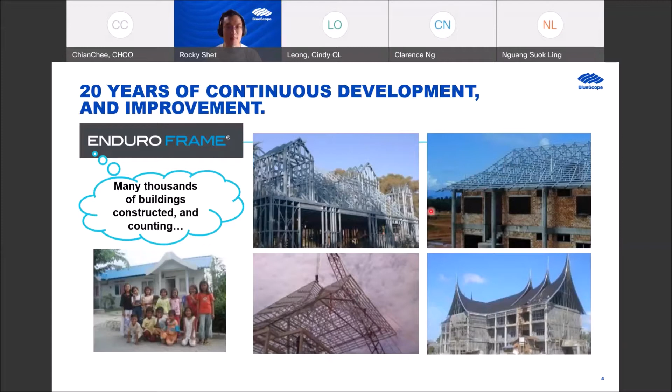We have moved on and improved, with more development and growth throughout the Australian environment, and also increasingly growing elsewhere in the world. Here you can see one of the projects in China, I'm not sure exactly where. And this is another one in a different part of the world, as you can see, one of our gentlemen here from South Africa. So this is how we have grown since 20 years ago using this system.

You can see here our system provider on a global scale, more so in Southeast Asia, because we started in Southeast Asia introducing our lightweight steel framing, especially the trusses. Then it moved back to Australia, and you can see Australia has been very successful with that model using our ENDUROFRAME system. We were also able to have a presence in Algeria and Ghana, also using our ENDUROFRAME system.

The ENDUROFRAME system is a complete steel frame system which encompasses two main players. The first, on the software side, is called EnduroCADD, and the hardware is a roll former machine called Enduro Roll Former. These two integrate with each other. We also have another software called EnduroHub, which integrates the whole digital technology, to offer a lightweight steel frame solution. To go about it, we provide training and support to our system providers on how to efficiently use our system and software to help in their projects.

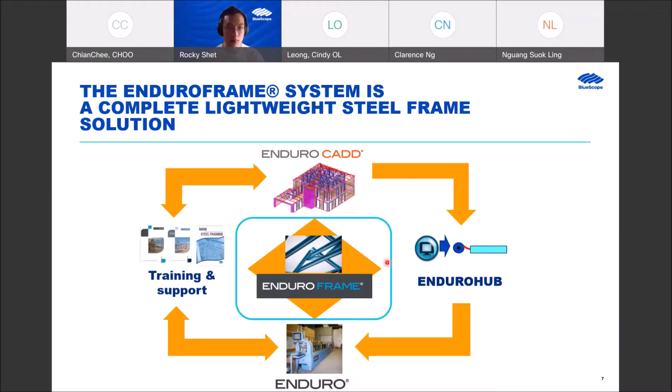We are also very lightweight in equipment - we only need one machine, the Enduro roll form machine, to generate two profiles that make up the whole complete framing system: a C section and a U section, manufactured through one machine. This C section is very unique. These two sections come in three sizes: 90 mm, 75 mm, and 70 mm in height.

As you can see, the flanges of the C section - the top flange is 40 mm, whereas the bottom flange is 38 mm. This is a special feature of our system. Also for this C section, you can see there's a rib on both sides of the web. This rib profile gives us 20% more strength over a plain C channel.

These C channels are meant to be used for our trusses as top chords, bottom chords, and also the internal members, the webs. This C rib channel is also used in our wall frames for all the studs in the wall frame.

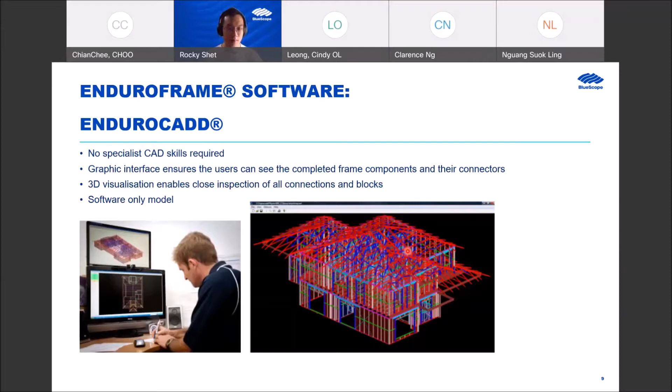Also, this software, EnduroCADD, allows great design flexibility to meet modern world construction, modern roof construction, like so. And also this complex roof shape can be easily modeled and detailed with the EnduroCADD software, eventually manufactured from our dedicated roll form machine.

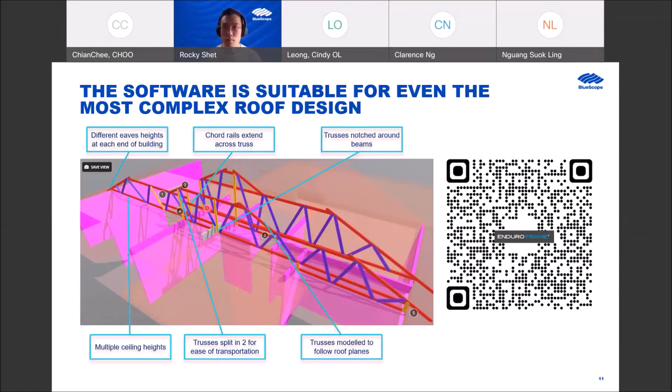Just to share with you, this software is also suitable for even the most complex roof designs like shown here. And you can see it's plain and simple and easy to conform to the complexity of this roof design.

To know more in depth of this complex roof trusses, I would like everyone in the floor, if you don't mind, to do a bit of exercise. Take out your smartphone, and hopefully you have a QR code scanner. If you can scan this code here, that would bring you to this graphics in a dynamic form.

Cindy also placed the link in the chat box, so if you are using the same device, you can click that link also. Okay, so here we go. When you click on the link, it will take you to this page here.

As you can see, you can use your two fingers to zoom in, zoom out, or use your finger to flick it to rotate it, like so.

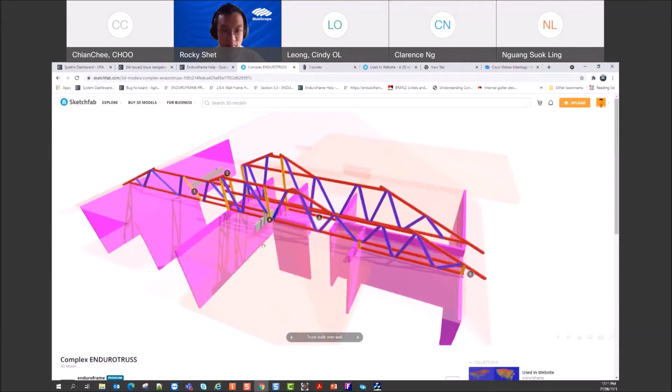Over here we have 5 pointers to bring to your attention. Firstly, it tells you this truss was built over the wall, and this truss automatically notched over the wall with a lower ceiling. So you can see how versatile the software is to adapt and conform to the structural requirements of the building.

And then the next one is here. You can see this truss can be split into two to ease the logistics, to make it into two parts so that it can be transported to the site easily.

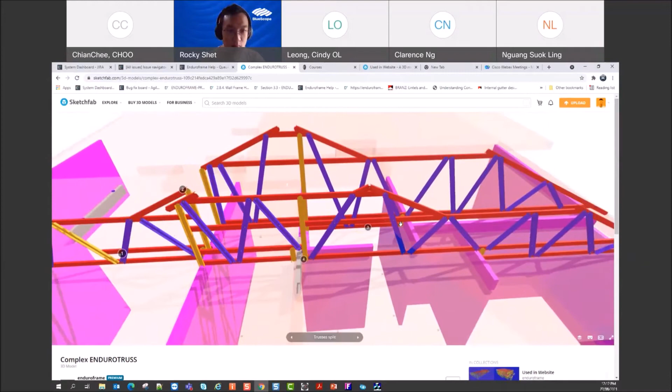And the next one is, you can see the ceiling can be lowered in the hallway, so no additional bulkhead is required. So you save a lot of materials here. Again, this software is very sophisticated, and you're able to do that.

And then the next one here, you can see there's a beam hidden in the ceiling. This would form a void block to have the structural beam sitting onto the wall, at the same time provide structural support over this truss here.

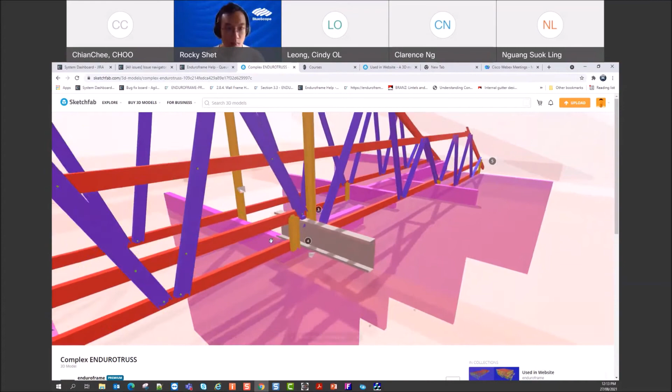And also, when there is a drop in the structural wall, we are able to keep to the roof profile by using a cut-off truss here to conform to the roof shape. So you can see this is where the software is suitable for that complexity of a roof.

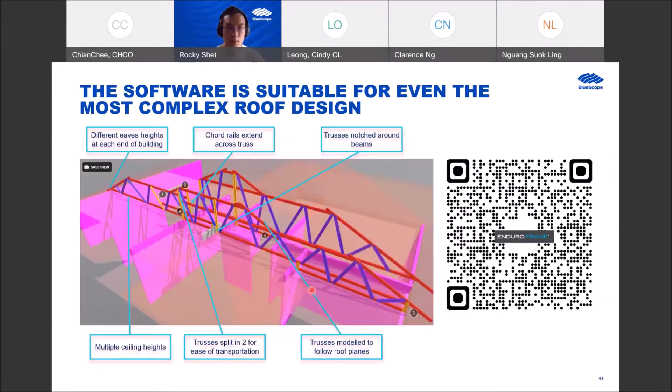Just to share with you, in the context of the Australian market, you can see our system provider has actually used our software in various types of projects. For example, this is a McDonald's standalone building, and then the other one is a kindergarten steel structure building. All these are lightweight steel framing, and we're happy to be able to provide that kind of solution to our system provider.

And this is how it works. The ENDUROCADD is the software behind our ENDUROFRAME system, which sets it apart and delivers an efficient framing model. And this is how the process is.

First and foremost, our software ENDUROCADD will read the architectural plan. We call it the E architectural plan, or D architectural plan, E for electronic, or D for digital. The format of it is in DXF format. Once that is available, the ENDUROCADD software will quickly develop a 3D model of that particular project or house, and then it will model all the steel framing components in that model.

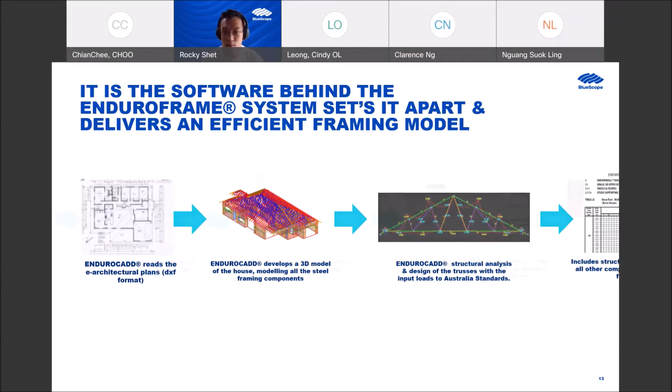We're also looking at other components like the wall frame components. We've included structural design tables to cater for that wall framing requirement, and then it will prepare the numerical control data, or NC data, for manufacturing.

So once all this is confirmed and signed off by the client, we get the software to prepare the certification for the trusses and for the wall frames in lieu of an engineer certification.

This is the first software in Australia which is compliant with what we call the ABCB protocol, Australian Building Codes Board protocol. The software is able to generate that certification without needing to go through a third-party engineering certification.

So next, once the sign-off has completed, all this NC data will send into our roll former machine, which has a software called ENDUROHUB, and this integrates to schedule the manufacturing orders of that project.

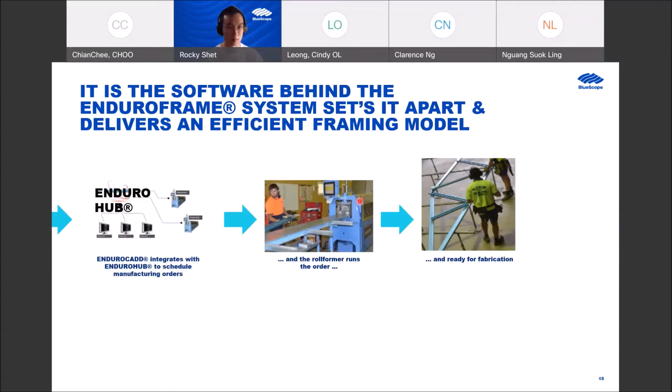The roll formers will then run the orders and get them ready for fabrication. Once the fabrication is completed, they are delivered to the site as a finished product, like you saw here on this screen. It looks exactly like a timber truss, but it is definitely much lighter.

You can see you don't need many people to actually lift that truss up to the roof for installation, and you can see the plasterboard is easily attached to our frame.

We also provide multiple service holes to cater for the wiring or water pipes that go through the frame around the whole project. And also, being steel, it's very straight—you don't need to shim it or add any packing.

Being steel, they are very straight. And also you can see that some of our parts here are actually linked like sausages.

If it's needed to assemble at the site, these are easily packed nicely in order. So when they go to the site and unpack it, they can know what components to look for when they do the assembly on site.

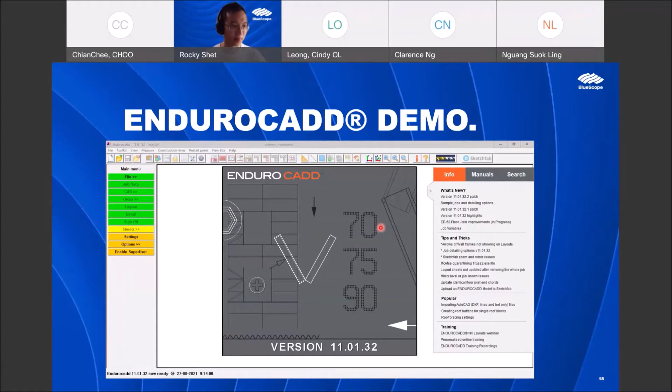So my second part presentation is to actually demo to everyone how we use our software. For this webinar, I have selected a simple job, a single story, simple job, so that we could actually finish on time.

Let me unshare my slide and go back to my software, which is over here. First and foremost, that drawing that I've shown you just now, I will need to import into my software, and this is how I go about importing it.

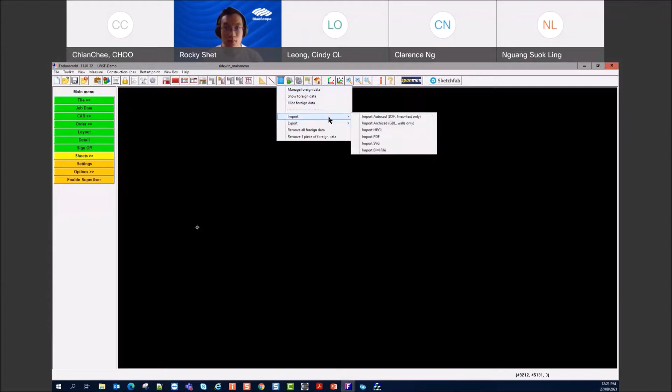This is over here, and this is how it looks like once it's imported. The same drawing that I showed just now in my presentation is all shown here.

Now I actually need the plan of this building to model, and I don't need the rest, so I need to click that plan there.

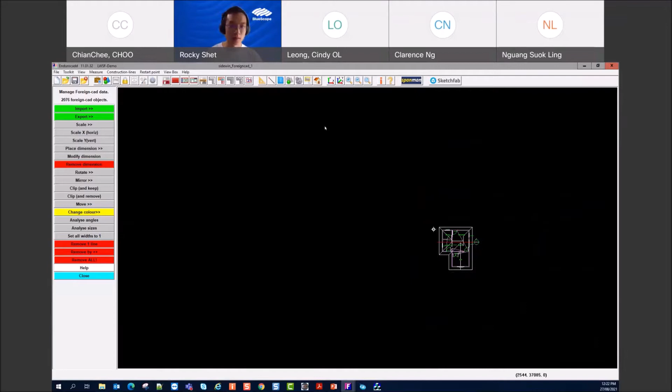Thanks for your patience, let me show you the flow of the software. So once that's imported, and like I said, we need this plan only, and the rest we don't have to keep in the software, so we can discard it.

The next thing I need to do is quickly show you those parameters that were highlighted that need to be input here, like the roof pitch, the overhang, and the truss spacing, which are all clearly shown in that architect drawing. So I need to capture those and put them in here.

We also need to put in the live load of the top chord and dead load of the top chord. In the plan, it's actually using a tile roof, so we need to put in the appropriate weight of the tile that the top chord will be supporting, and also the batten spacing that supports the roof tiles to be restrained onto our top chord.

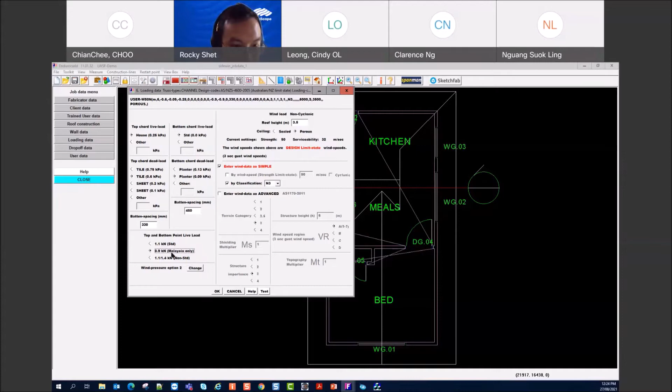We also need the point live load as per the Australian standard AS 4600. In the Australian context, we assign 1.1 kilonewton as standard. If this were to be used in Malaysia, being the fact that Malaysians are smaller in size, we could use a lighter point live load to design the top and bottom chord of the trusses. Does that mean it's the weight of one person? Yes, that's right.

And then the next one is basically the wind load here. I'm using N3, which is equivalent to 50 meters per second. If you have anything less than that, you can select this one, and it actually tells you it's 40 meters per second. So these are all the important parameters that the software will use when designing the components.

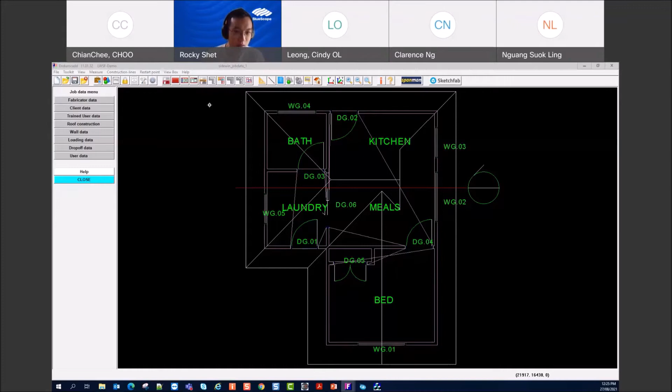So once that's out of the way... So just now the parameters, one thing I saw is that there are actually different tiles in terms of weight that you selected, so it can be a heavier roof tile or lighter roof sheet, correct? Correct, that's right. For example, here we have 4 entries, 2 for roof sheet and 2 for concrete tiles.

However, if the concrete tiles specified in the architect drawing is more than this value, then we need to go in here and put in that value as specified, say for example 0.65, and the software will use that information in the design. So this software also provides that kind of flexibility in case it doesn't fall into these 4 main typical categories of dead loads.

Does it include, say, the weight of the insulation, if that was the case? Good question. If you want to include the insulation, this is the right time to include it together with your roof tiles over here. So you need to manually calculate the insulation plus your tile weight, so maybe you could pump it up to 0.69, for example, including insulation. This is where you input that specific dead load, and the software will use that figure in the design.

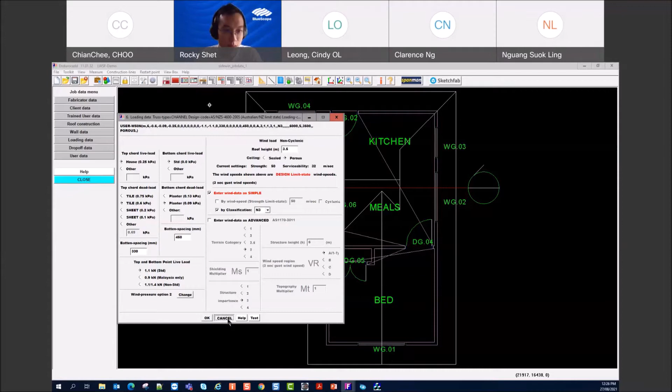All right, so in essence it's just the whole roof system weight. Yep, the dead load, they call it the dead load. Okay.

All right, so once that is completed, the next thing is basically we need to go in and start doing the modeling. Just to show you how easily it is.

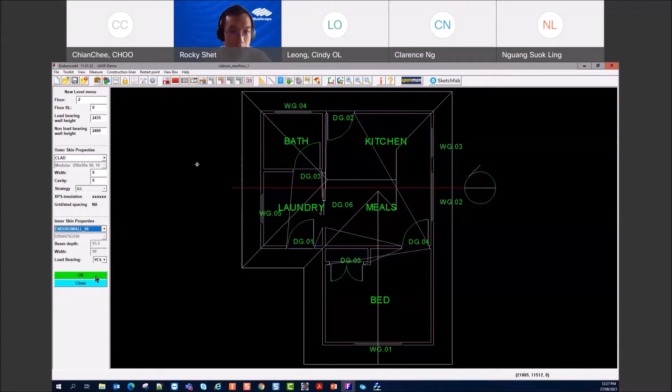I need to ascertain what is specified in the architect drawing, using a wall frame of 90mm. I need to make sure that's correct, because in my system here I have not only 90, but also 75mm and 70mm. So it's good to double confirm that it's 90mm that the frame can be used to meet the specification of the client. Once that's satisfactory, all I need to do is trace the outline of this external wall here, like so.

So you can see straight away it is actually forming the wall rather than lines. That's how we model. We model the wall and not draw line by line.

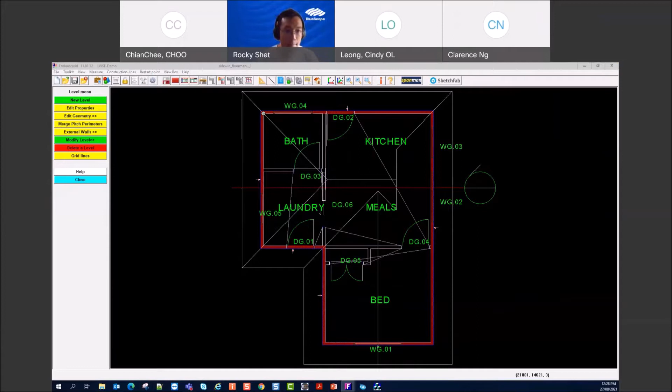So over here, has the frame already been constructed inside the software? Yep. So for the sake of this demonstration, I have actually pre-traced the wall and also the internal wall.

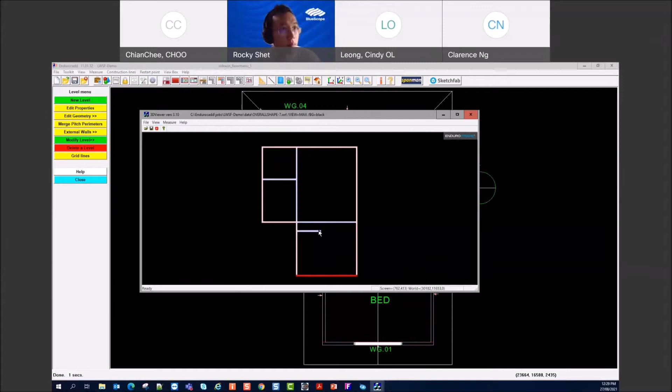Let's see. So the internal wall is easily traced. Okay, and you can see there's one wall missing here, accidentally not put in, so I can show you how that internal wall can be quickly put in. Okay, let's do that.

Let me hide this. You can see the wall was forgotten to put in, in a rush. So let's put in that wall to demonstrate how that is done. We go on to the next one, a new wall. I need to insert that wall there. And then...

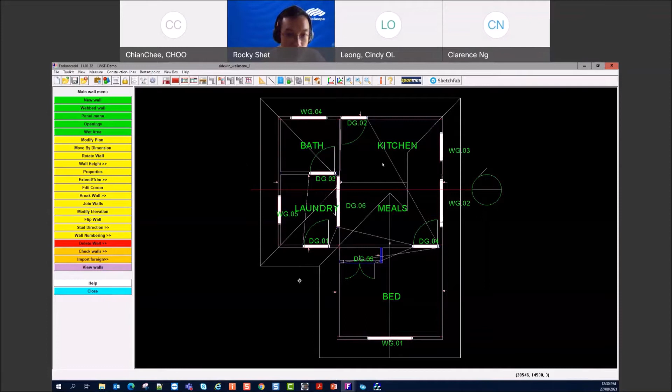If I were to hide this, you can see that wall is there already. So it's quickly done using this software, and it's now shown very clearly. That wall is there, together with all the openings.

Mr. Choo, I noticed there are some color coding, one in blue and one in red. What would be the difference? Yes, the one in red is what we call the load-bearing wall. Load-bearing wall is where it actually supports the truss, the truss sits on it. And then the blue one we call a non-load-bearing wall.

So does that mean, if let's say the owner wants to remove that wall, provided this has been given a green light from the engineers themselves, then they can do so for the non-load bearing wall? Yes, correct, that's right. So the owner or whoever wants to do a modification needs to get their engineer to give the green light, knowing this will not affect anything structurally, especially the truss above the wall.

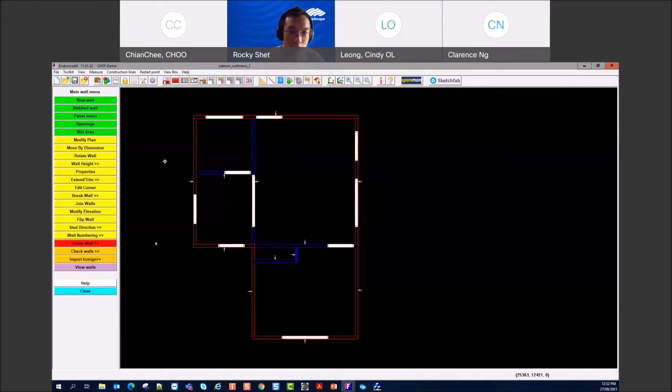So are these counted for in the early stage, before it's being constructed? Or has this already identified that, the blue would be the non-load bearing wall? Yep, this would also be identified in the structural drawing. The structural drawing will define whether there are any internal walls to be a load-bearing wall. So we will also follow that structural drawing.

And if this needs to be a load-bearing wall, we will convert this into a load-bearing wall, if that is the case. And then sometimes, when there's a revision of drawing, and they say this is not a load-bearing wall, we have to revise our model to reflect that change in the revision.

I might be jumping the gun here, there are quite a lot of questions, but I think after this wall is constructed, I recall straight away the trusses or so-called members would have already been in place, right, in the wall itself? Yes, correct, that's right.

But let's finish the model first, because this software process is actually model up and design down. Let me share with you the right phrase to use. So this is what I'm doing, I start with a model up first.

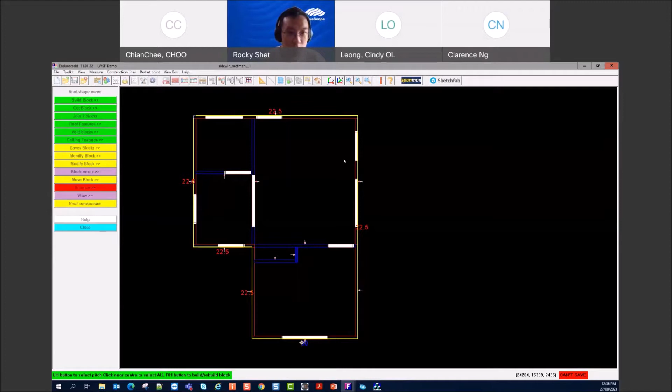Okay, I need to change this one to 90 degrees because this one, 90 degrees, is actually a gable end, which is different from this end here, which is called a hip end. Okay, stay with me, let me finish this process.

And straight away, there you go, it has a roof block in there. And straight away you can see, so I have a gable end here, which is a 90 degree that causes the gable end, and the rest are hip, conforming to the roof pitch of 22.5 degrees.

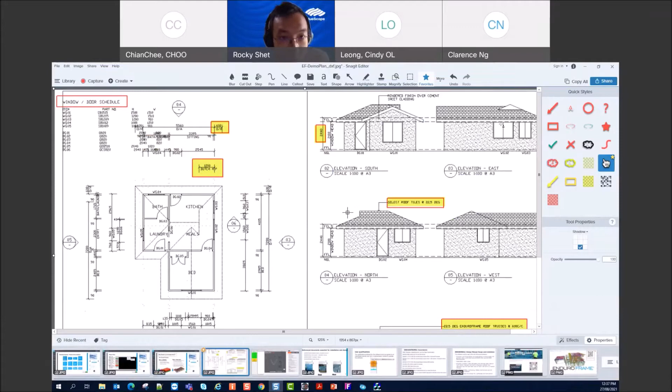And if you look back to our customer drawing over here, you can see the roof here is a bit different, not a hip, they want it to be a Dutch shape. Okay, so we need to comply to that requirement, so I need to do a bit more work to change to the customer's roof profile. And to do that, this is what I need to do.

I do a face cut here, and then the software will be able to digest this process, and it tells you, hey, I identified the hip and hip at both ends, is this correct? I will say yes, that is correct. And then move on to this roof block and it tells you, hey, I identified a gable end here and a saddle roof over here, okay, let's say it's correct. All right, and here you go.

Now I need to add the feature, the Dutch shape feature. I select this roof pitch, and then I set back by 1200 as per the architect drawing. And yep, it looks correct, and it tells you this is a hip and this is a Dutch hip.

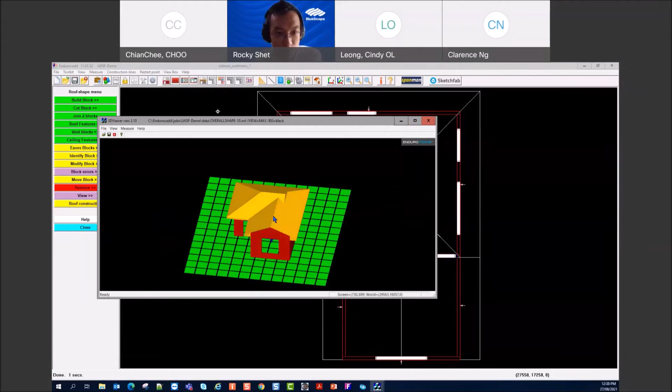Okay, and again, we look at our model again, and this could easily conform to the fact that we are doing exactly what the client wants us to model. And this looks exactly as the customer's house. So this is so-called the model.

Without any supporting member yet? No, not yet. Okay, this is cool, just the modeling process. Okay, so once I got this done, modeling process, now I need to actually follow the next step, which is this one here, start building down. Okay.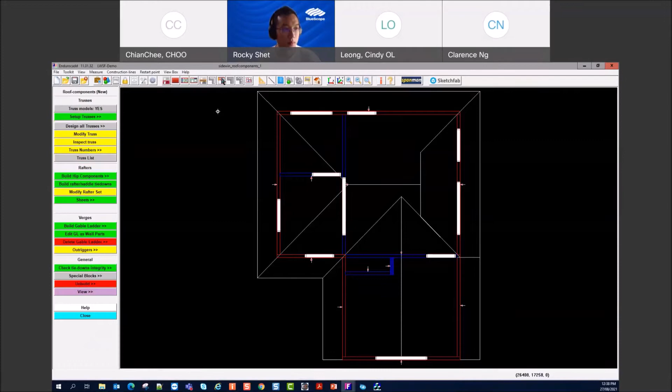So the next step would be here. And then I need to set up the trusses, and straight away the software utilizes the information that we have input earlier, where the truss spacing, remember, was 600. So it knows how to put all those trusses in accordance to that 600 truss spacing.

So it will be taking some time to do some calculation and distribution, right? You can see here, it's telling you what it's doing, it's setting up the trusses now. Okay, 9 trusses, so now it's looking at truss 3, and then we'll move on to 4 and finishes at 9. While it's doing that, I think it's a good chance for us to answer some questions from the floor, which I think might be relevant.

So, is it able to be combined into BIM modeling? One of the questions, the answer is yes, we can export this into the BIM, lock, stock and barrel, our ENDUROFRAME components, everything. Yep, we can export it into the BIM software.

Okay, cool. And another question, which is regarding the ENDUROFRAME roll forming machine, is that regarding to your earlier slide about the C channel and the U channel. Yes, so the question is, any reason why U channel is still being produced even though the C channel has 20% extra strength compared to the U channel, and wouldn't it be much more efficient to have a production line that has only one machine instead of 2 machines? So I believe the question comes in because they would assume U channel would have one machine and then C channel would have another machine. Perhaps Mr. Choo, you can enlighten us on how these two channels are being made.

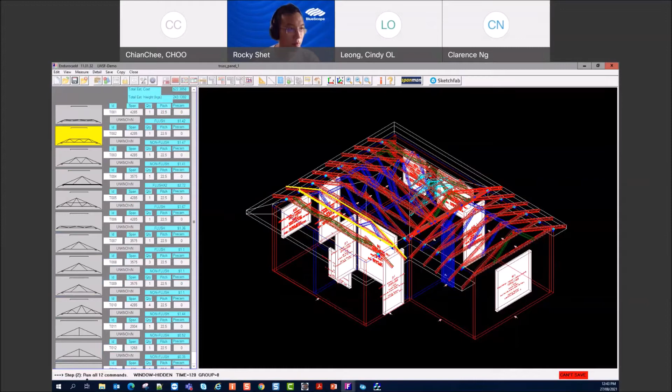So we need to design, which means we need to change this word 'unknown' to either design pass or fail. To do that, we can come here, select all trusses, and auto design all trusses fixed web. So this is another process. Here you go, it is actually running all the commands there.

And while we let it finish, is there any other question I could quickly answer? Okay, great, yeah there are a few questions. So I think some are jumping the gun here regarding the wind loading, because I believe later we'll be sharing how to actually improve the design to withstand a certain wind load.

They are also self-certifying, self-certification in lieu of engineer's endorsement. So that one we will come back to after the design of the trusses has been done.

I think maybe during this process it's good to also answer this question: is this EnduroFrame, can it be designed and calculated and verified by professional engineers? I'd love to answer that question also later on.

Okay good, if Rocky can put it in a parking lot there so that you won't miss it. Thank you, there are overwhelmingly a lot of questions.

So okay, maybe this is more towards the EnduroCAD question: is the software used developed by BlueScope, and is it available for engineers to use publicly?

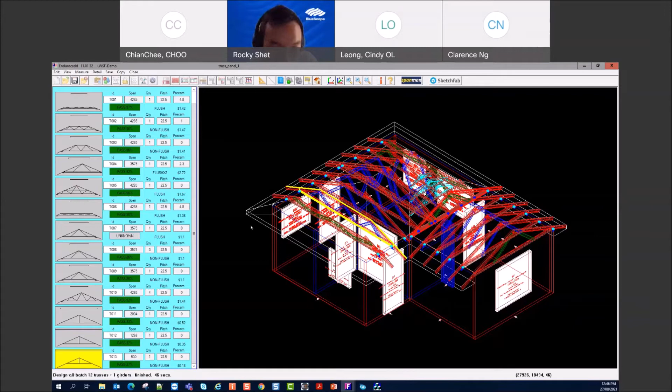All right, cool. So I believe the trusses are done. Yep, the trusses are done. Okay, I have one here, you can see it's still unknown.

Okay, let's look at why it is unknown, whereas the rest of the trusses are all design pass. So at least I got something to show you all why it is unknown, rather than all pass and then you don't learn anything.

Let's quickly explain what the audience are seeing. The green ones on the left are already designed and pass all the codes stipulated in AS4600.

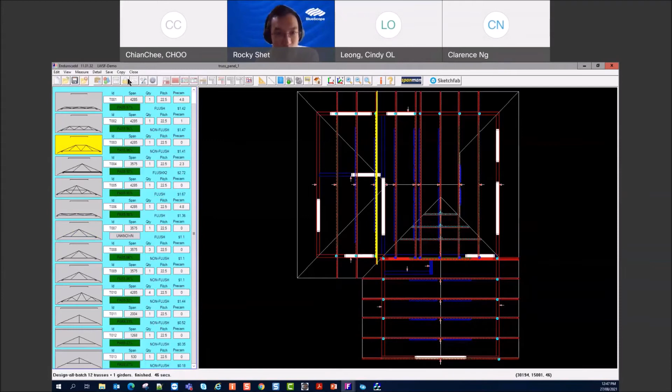Okay, let's look at this one here. When I left click on this one, it tells me I'm looking at this truss. So this software is very focused - at least we know what we are looking at and what we're dealing with. Now let's come back to this truss here and go in and have a look why this one fails.

And you bring up this screen here. Usually we click design fixed webs here, and then we go and check, and it tells us, hang on, that's not enough support. So that's why the software will not proceed with the design.

So that's how the integrity of the software works - where the model is correct, the software knows what to do. When the model is not in line, the software will know and prompt you, saying 'I cannot move on because there's no support, I cannot design.' Okay, you guys with me? So I'll stop this one.

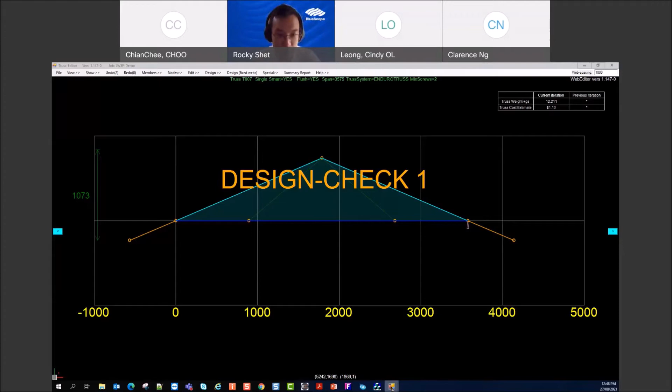Okay, I'll stop this one and have a look at this model closely.

If you look at the trusses next to it, you have these blue dots here. The software understood this model, and these blue dots indicate there would be a support there. However, because it's so close to the edge, the software got kind of confused, so it stopped designing this.

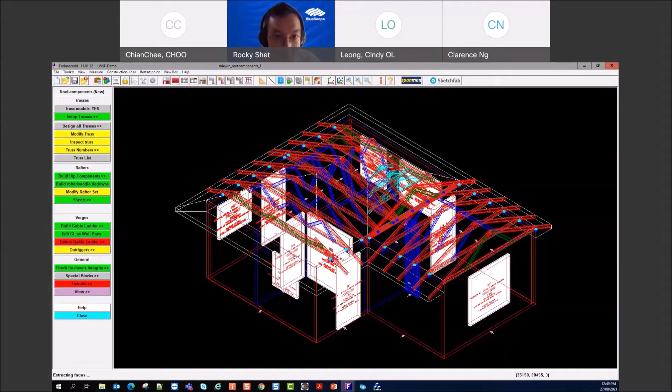So I need to make it right. Let me close this one and quickly show you this model in 3D, which is over here.

As you can see, I have a gable wall here, and as it happens this gable truss is actually very close, in fact clashing with that wall there.

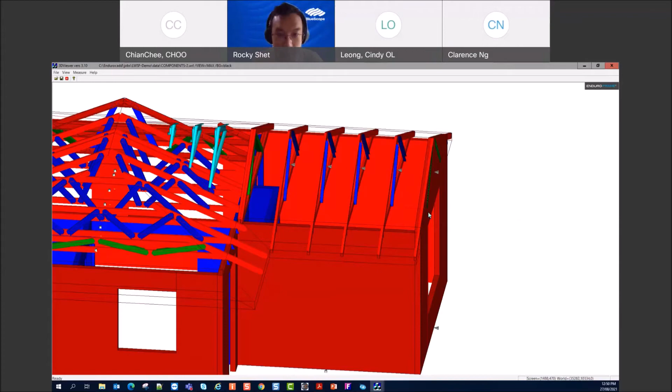So what I need to do is avoid this conflict. I need to manually have the software move these trusses away from this gable wall so they're not conflicting with each other. That's probably why the software wasn't able to put in a truss support, like shown here in blue triangle, at this end. So let's do that.

Let's go to plan view and click on this truss, then move by distance. I want to move inwards, into the negative direction, so I put negative — maybe I move about 100mm into the building.

You can see straight away that it's been moved, and something is happening — you're able to detect the load bearing wall, and it puts the support for the trusses there.

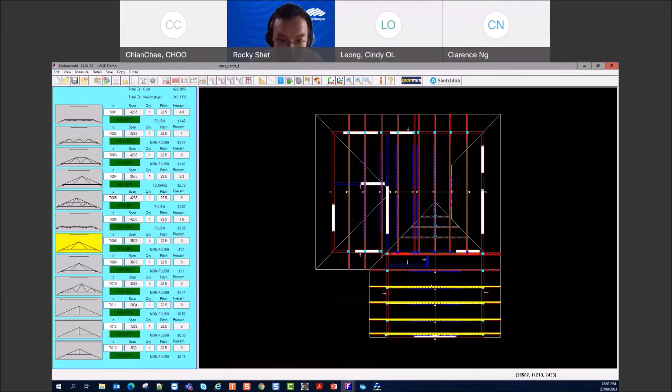Now I go back to that truss list, and it's able to understand the action I've done — it actually groups the truss I moved in by 100mm to be the same truss as the other one. So now it's grouped into truss 8. I see, so we have some intelligence in there.

So this is basically the roof truss section, right? Yep, so let's look at this one. This is that roof truss, and this is how it looks like as a real truss — with the real members, bottom chord, top chord, and the webs.

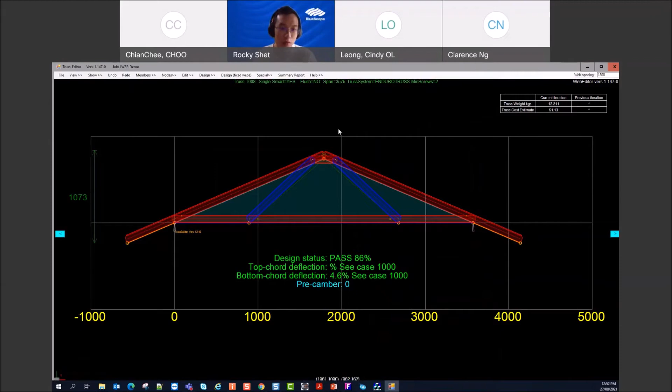So Mr. Choo, if I may stop you there — can you explain a bit about the design status? What does this mean, 80% pass, 86% pass? Okay, good question.

Let me show you behind the scenes, the engineering part of it. There's another screen here, and then right now...

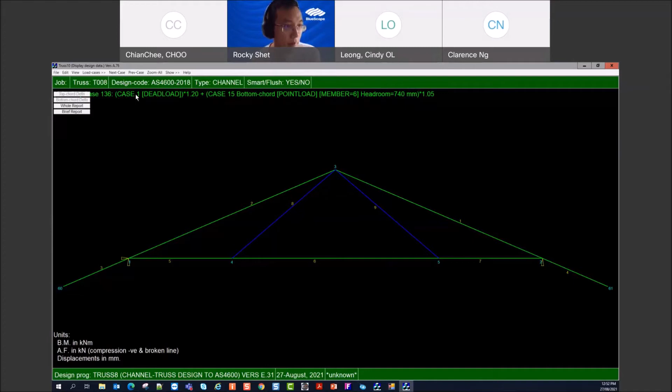Right now this software is looking at load case 136, which is the worst case scenario, designed to Australian code AS4600. Load case 136 is a combination of dead load in load case 1 times factor 1.2, plus load case 15, which is a bottom point load, with a factor of safety 1.05.

If I were to show the applied loads, here you go — this is load case 136, so the dead loads plus this point load. This would give us a worst case scenario.

You also give us the reaction due to this load case 136, and you're talking about that performance — what was the performance just now? You're talking about 86% pass. You can see here, 86%.

So it's referring to this connection here that is working very hard compared to other parts of the components. Due to this load case 136, this gives the worst case of 86% — meaning it actually utilized 86% of its capacity, which has a reserve strength of about 14%. So it's working very hard compared to other parts of the roof.

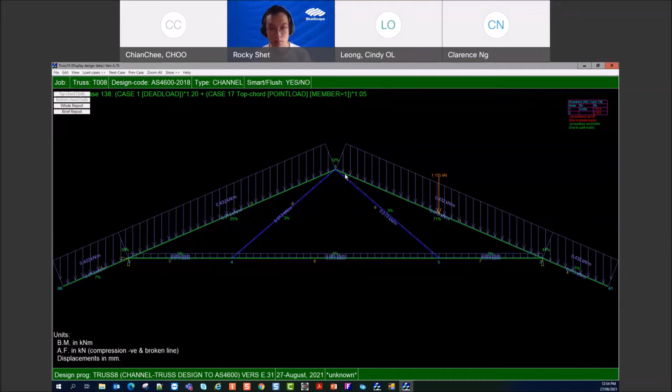If we look at the next load case, you can see it's 66% due to a different load case. So the software is clever enough to pick the worst case scenario and tell us that, due to load case 136, its design performance is 86%.

So you know, inside this software it has coded all the needed, required loads and load combinations specified in Australian standards. We have primary loads here — dead load, live load, and others — which constitute about 18 load cases for the primary loads. Then from load case 100 onwards...

Can you imagine doing it by hand? Yep — up to load case 139, so there are 39 load combination cases that the software designs accordingly as needed in the code. And last but not least, starting from 1000 to 1023, so we have 23 load combination cases to look after the deflection of this truss.

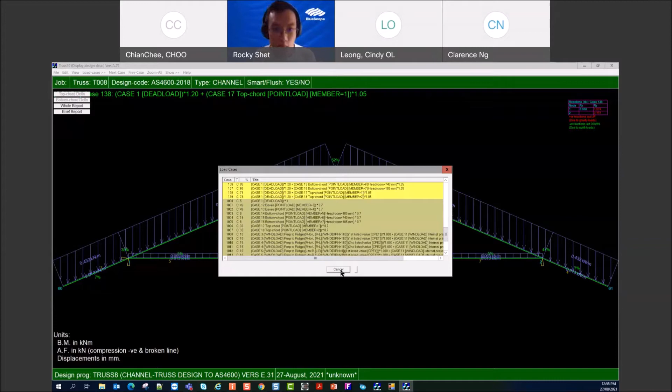So this software is very, very versatile in that sense. It takes into consideration all the possible load combinations in the design process. Right, yep, this is true.

Is it able to, I mean, just now you mentioned 86%, right? Are you able to improve, so-called reduce the capacity, reduce the percentage to a lower percent so that it doesn't get so close to the capacity load? Okay, meaning before we go any further, here we can actually get the software to calculate the performance of that connection, and that's where the 86% comes in.

And over here, this node actually has 8 screws that we have test data stored in the software, to understand and to be able to provide a very efficient design in terms of our product scope.

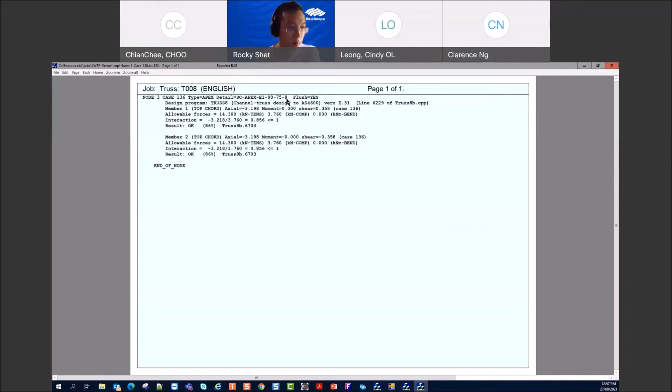So back to your question, let's close this one and go back to this one. So like I said, it's shown 8 screws, or if you were to look here, we also have a label that tells you this is an 8 screw connection.

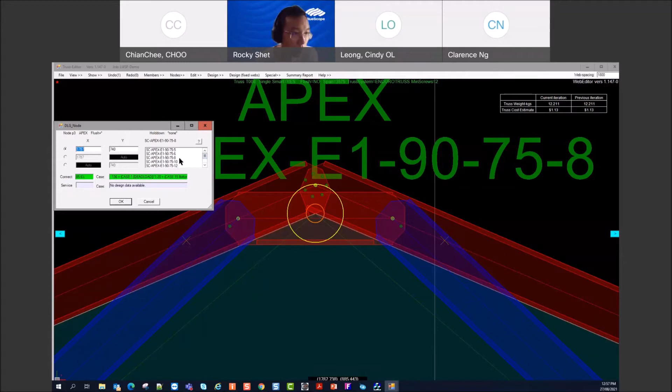So when I click here and edit this node, it has stored for this node a few types of required connections, and the software will use this information to do the design process, and it will pick the right combination of screws that could satisfy this design.

As you can see, it started with 5 screw, then 6 screw, 8 screw, 10 screw, and 12 screw, and it goes all the way to some other combination. The reason it stopped at 8 is because it knows that it's very close to 100%. Anything over 100%, it will fail the design.

So for example, I want to use the 5 screw here to test the design. I go with the design using 5 screw, and then it straight away tells me, see, it's not able to restrain the design requirement with 5 screw.

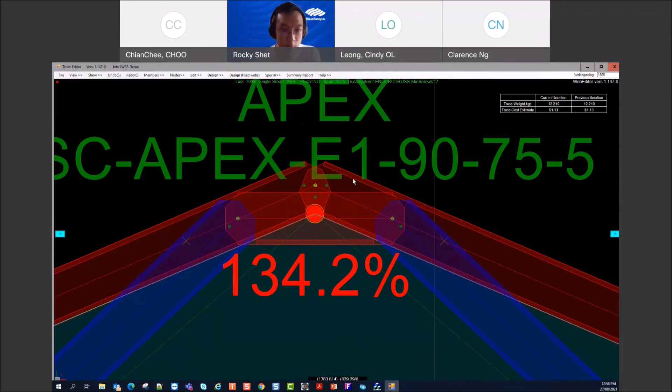So the screws, even though it's so minute, plays a huge role in the integrity. It does, yeah. It does, it does, yeah. So you can see it.

I get it to start at 5 screw, and it understood, and it went into the design process, and straight away tells me that 5 screw cannot do the job, and is failing at 134%. So that's how accurate the design is using this software.

So I'll let the software make the decision and let it run, and straight away it tells you, okay, here you go, 8 screw is good enough.

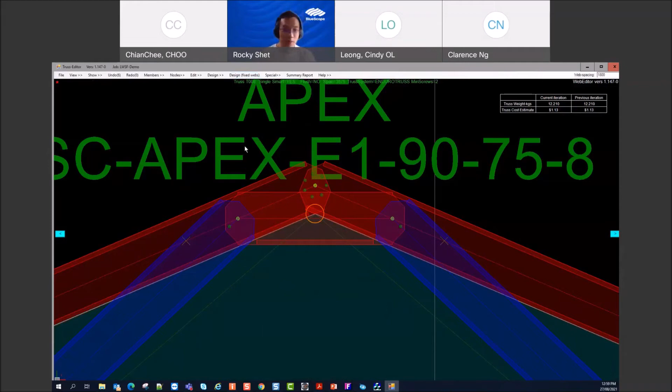All right, Mr. Chu. So I believe after this modeling, as you mentioned earlier, model up and design down. So after this process, after the roof truss is in place, the next will be the wall frame, right?

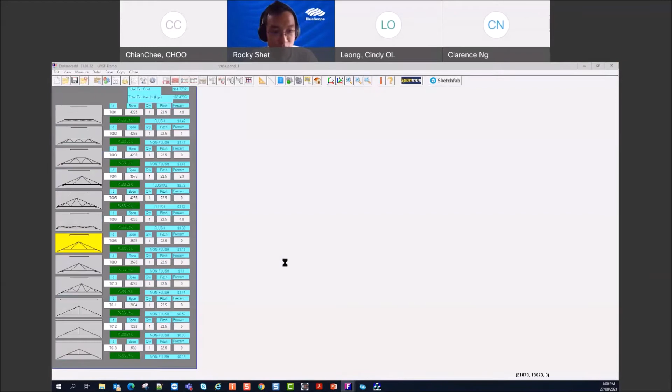Yeah, the next will be wall frame, but let me quickly show you, beside the engineering part, I'm able to generate assembly drawings, because the people need to assemble these components, they need some kind of drawing. Make sense? Yep, makes sense.

Yep, so the software is able to generate what we call the truss fabrication drawing. So the people at the site, once all these components are rolled out and cut to length, they need to make use of this fabrication drawing, the truss fabrication drawing, to actually put it together to form this truss so that it can conform to the design.

And also can do a quality check easily using this fabrication sheet before they send it out to the site to do the installation. So you can see they're integrated with each other very well.

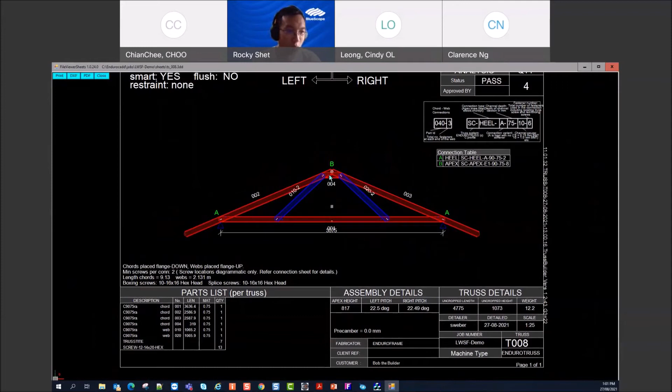Mr. Chu, I have a question specifically for this drawing you just shown, from Alfred Lee. The question is that in Malaysia, we have cases where the design is being ordered, but then the installers themselves are not accredited because of high turnover rate from the workmanship. So does this document allow, say for example, any qualified person to basically do self-checking? And is it mandatory for the engineer to certify the completed structure?

Very good question. First and foremost, of course, all this needs to be trained. We can assure that the training can be minimal.

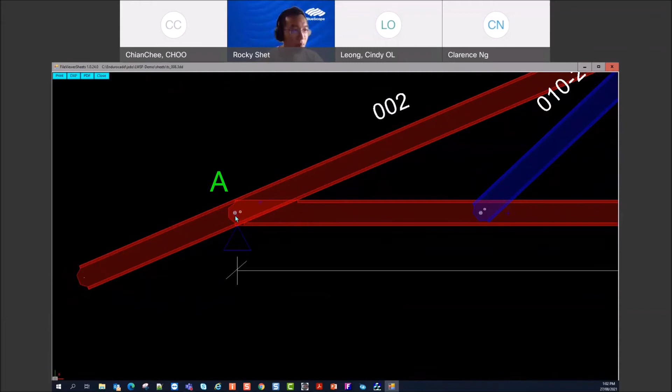Our system here is called Smart, meaning that all the holes are pre-determined by the software and pre-punched by the machine. When they put this together, the holes have to align. When they are aligned, that means it needs a screw there. So if you do a quality check, you can easily see that there are holes but no screw, that means it doesn't meet the requirement.

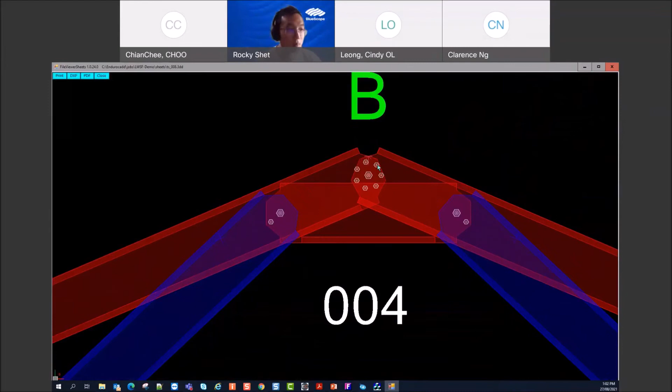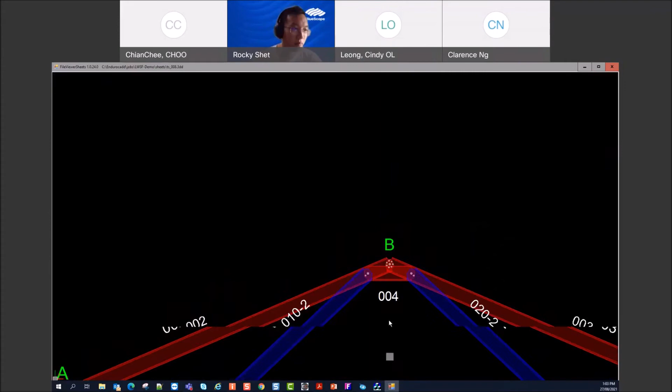Our system has improved a lot since 20 years ago, where in all the areas that need a screw, they actually have holes there. So they use this to do a quality check very fast. Any members where the holes are aligned but there's no screw means they're not doing the right thing, so it's quite foolproof. Yeah, that's right. Hope that answered your question, Alfred.

As you know, labor here in Australia is very expensive. They cannot hire a lot of people like in Malaysia. So we were able to provide this kind of support so their staff need minimal training and can actually do the work efficiently using our system.

So, time for the framing. We have done the design of the trusses, all good. Before I move to framing, I also need to put the rafter there to make it complete. This is how the software will do it.

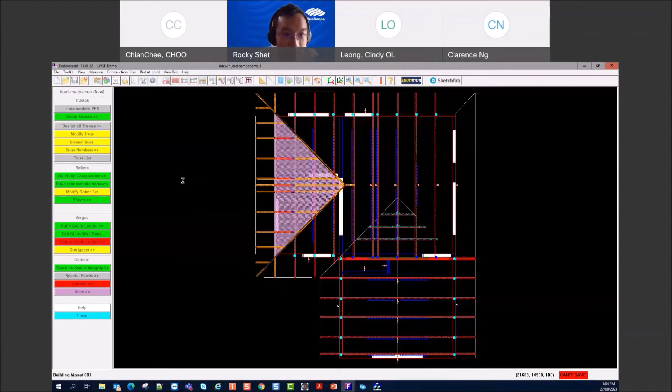Okay, so it's calculating.

There are some questions about the specific design criteria, particularly on long span structures, comparing it to mild steel or structural steel. I'm not sure whether off the top of your head you can come up with any experience designing for a 16-meter span structural steel roof truss with 900 depth truss. What does it carry, a metal roof or concrete tiles?

That's a question, but look, this software is an engineering software. We can use it to satisfy your what-if span question. It can easily show you how good the design is and what failed and how to minimize the failure, that kind of thing. This software is fantastic, user-friendly, and easy to explore to give you an answer to your what-if question.

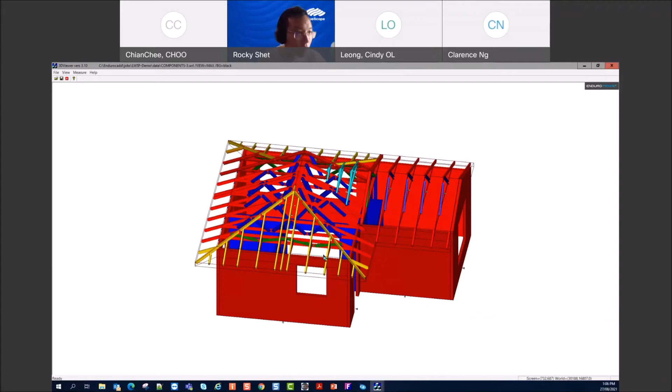Let's move on, the rafter is already put in there. And now it looks like the roof is complete.

Before I forget, I thought that maybe let's finish before I... yeah, let's do that now.

Once that's done, we move on to the wall. Let me put in the 3D view. You can see the walls are still not built yet, so I need to go to the wall.

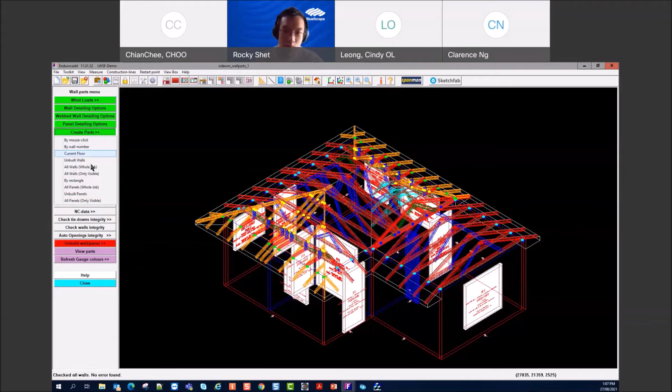Let's create all the walls. I click create parts, all wall whole job. You can see down here it's building the wall, calculating and all those things. It understood my command and went ahead to do that. You can see all the walls are being created, and all the studs in place where they should be, and also the openings being created as you create the parts for the wall panels.

I think there are a few questions asking how the design gets translated into manufacturing, which I think after this, once you have concluded this design, we can get to.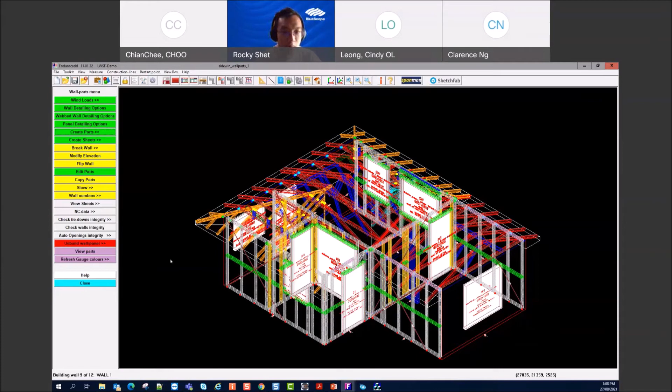If I may just compile everything, some are asking about self-certifying and all that. As I understand it from our discussion, the outcome, the so-called percentage pass that you showed earlier, like 83% capacity, those are based on tested data, right?

Correct, not really a simulation per se, it's based on the tested data and then put back into the software. That's right. All our products, not only our ENDUROFRAME system but all our roofing sheets, even our purlins, even our BONDEK, all these products are all tested so that we better understand ourselves and our product than anything else.

So that's why the specifier has confidence using our products. They know that we deliver what we promise. Of course, this comes with a price, unfortunately, but I think we'd like to sleep easy, isn't it? Not wake up with nightmares, cold sweat, that kind of thing.

When it comes to self-certifying, as I recall, it does not just rely on the software itself. It has an extent to who is designing it. Is that correct?

Look, the software has come to a phase where it is now able to provide a good system to satisfy the user. But again, garbage in, garbage out. As far as the integrity of software, we take it very seriously, challengingly, so that this will not be misused.

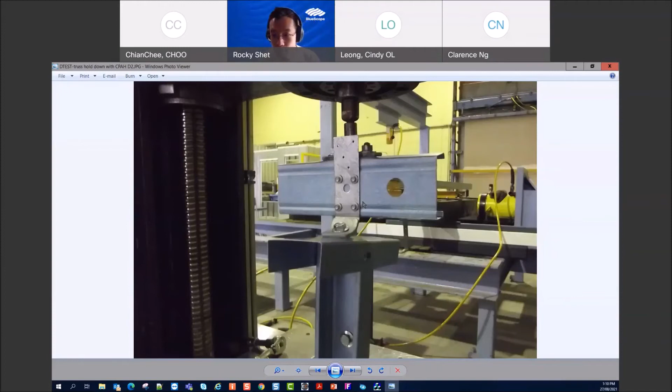Just to share with you, since we're on this topic, in our test lab, all these are actually tested in real life, real trusses. You can see here all the testing rig. All full-scale testing, test to destruction, so that we know how much to push the boundary.

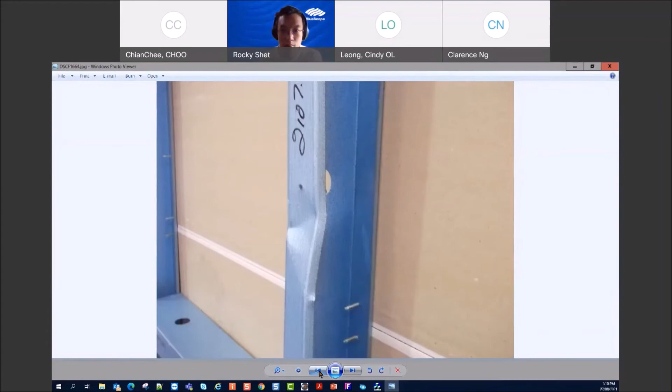So here are all the records that we keep when we do the testing. And all this information is then translated and put into the software that we can use and utilize.

All right, so I believe the framing is completed. Yep, the framing has completed, and the job is done. Let's have a look at this wall here.

All right, so we're looking at the gable end wall here. And over here, you can see we have a color in red arrows. The software is also able to detect, hey, that's something clashing or something not right, just to forewarn the user.

And it tells you, here you go. This area highlighted in yellow, warnings. So need to look into deeper what causes that warning there. We have trained our software, and the software user, to actually know how to look at this thing.

And you can see, yeah, sometimes there's some clashing here, and the software user would know how to resolve this issue. So you can see there are two components here that clash. So all the user needs to do is, let's say, quickly remove this.

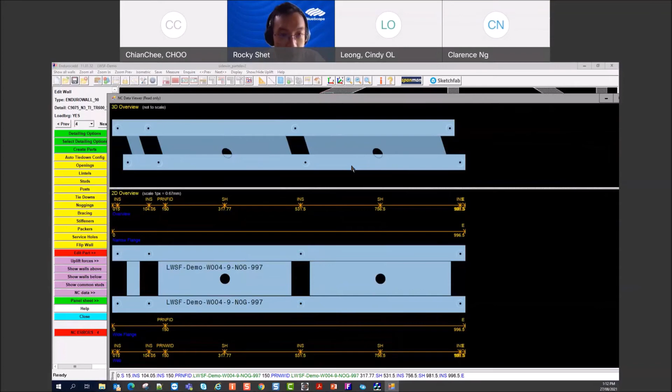By the way, this one is a nogging, we call it, and you can see up here, it's called a U section. This is how it looks like. That's right, the U section. See, it's a U section. And this is used for the nogging, and for the top plate and the bottom plate.

Okay, and since we're on here, we can look at the C section. And here you go, this is the C section.

So you can see the software is very integrated with our machine, because the machine is able to take all this information and roll up, cut to length, and then all these service holes will punch accordingly to the design.

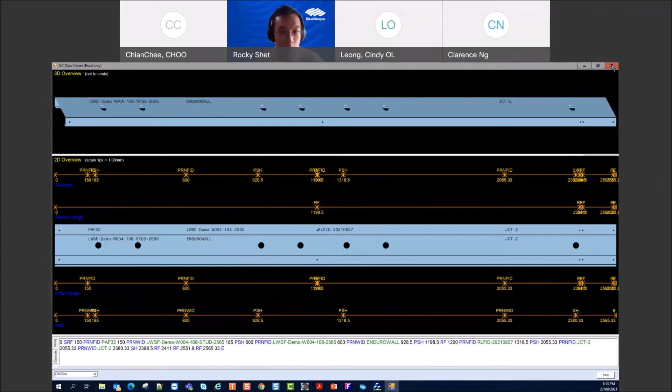All right, so let's delete this one, for instance. Okay, and then let's extend it, this one to end here. Okay, let's try again.

So I want to extend this part to over here. Straight away, you understood. And then I can regenerate the numerical data, and the software will do the check and let you know, hey, you did something good, but still there's some warning there. Okay, and then highlight - it tells me that, hey, you've got to look into here and see what is not right.

Over here, I have made the change and it is happy. It didn't show me the warning at this side, but I purposely did not make the change here, and it still recognizes that there's something not right there. So before it goes to the machine, it's already been checked in this software. There's no material wastage, unnecessary, that kind of thing. So everything is 100% good to go.

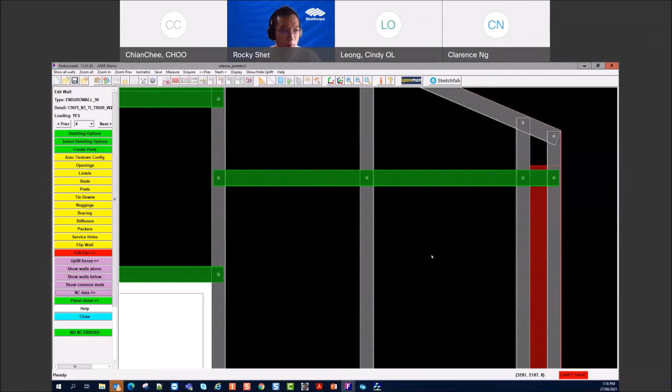The simple answer is no, provided those machines are made from the same manufacturer. But again, not necessarily the manufacturer that makes another machine has the same requirement as what we put in our software. So I would say 99.99% no - you can't use any other machine to manufacture ENDUROFRAME's system, because ours is very special.

So now it's fixed, the one on the right. Okay, so let's recreate the NC data and we'll check again. And we look at here. Yep, it's no more red color, so it's all fixed. Okay, how much time do I have left?

Probably very little. We almost ran over by 15 minutes, but just one last part before we sign this off as a so-called design.

So once the design is satisfactory to the client and to everybody, we can lock in the order. We take the down payment from the client, and then we can sign off this job and lock in everything. Once signed off, everything is locked and you can't make any changes anymore. Then this goes to our Endura Hub software in our machine, and we pull in all the NC data to process and manufacture all the parts.

Okay, so last question - I think someone was asking about wind load. The concern is that due to changing windy conditions, not just in Malaysia but across the world, the parameter we mentioned earlier was 50 meters per second wind load.

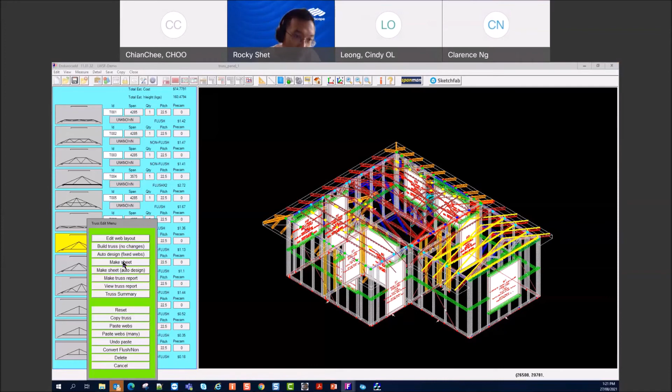Okay, so this will be the last question before - are you going to show the wind design? I'll just quickly show you with this new 66 meters per second.

I need to show you another sheet generated by the software - it's called the engineering sheet. So for this truss here, it passes, and it tells you - here you go, 66 meters per second is used in the design for this truss.

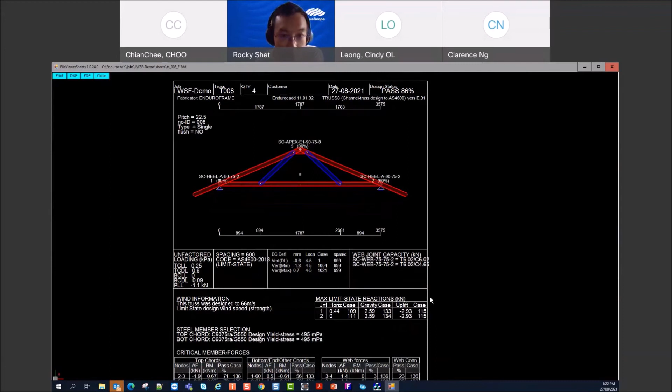So you can change it and get the software to redesign based on your new information. And here the engineering sheet will tell you exactly how each of the trusses performs based on this new wind speed of 66 meters per second.

Okay, but what you just demonstrated is only for one section, right? It's not for the whole thing - it will take time. Yeah, it will take time. The software is able to do that, but again, it's good to manually check it so that the software is not misbehaving. This is how we train our software users.

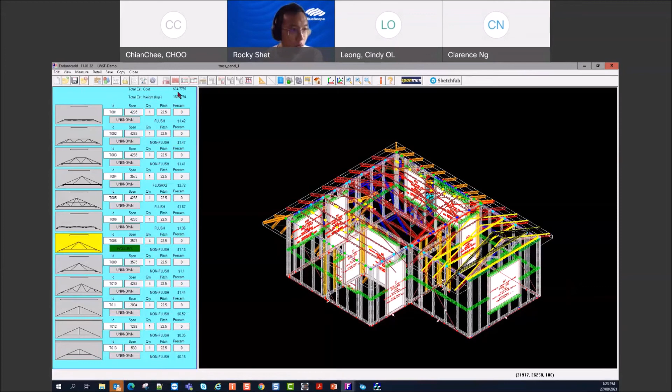Last question before we close this demonstration - is the software able to assist to determine where to apply the bracing on truss and frame?

Yes, the software is able to determine the bracing. As you can see, when it actually creates the parts, it straight away knows where to put in the bracing according to the code. And again, the user manually has to check whether that bracing the software put in is enough to satisfy the capacity of the wind load.

And quickly to show you that, here you go, the wind load calculation extracts all this information. Oops, sorry. And it shouldn't take long, only 12 seconds.

So once that is done, we have a look here, and the software will quickly give us an answer. So based on this 66 meters per second, the total load capacity due to this wind is 33.49 kilonewton, but the bracing capacity that the software put in only can come up with 10.6 kilonewton.

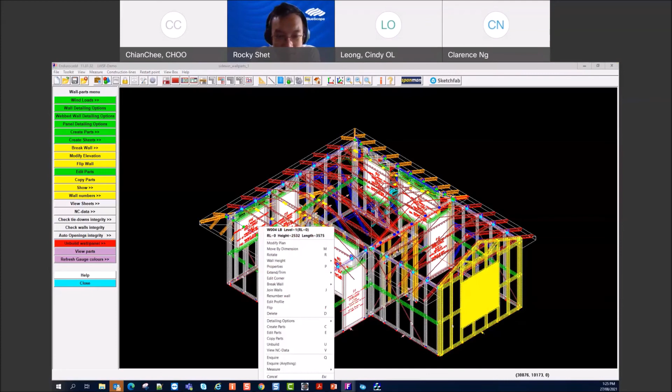Clearly this would take a whole redesign if we were to comply with that load requirement shown earlier. Yes, correct, that's right. So you're just trying to get closer to that requirement rather than passing it. Yes, that's right. Okay, cool.

Yeah, cool. So to do that, just for demonstration purposes, we can quickly put in a strap bracing. There are a list of strap bracings to put in, for instance, and then we can put front and back or both sides of this wall. Okay, let's put both sides and try this one.

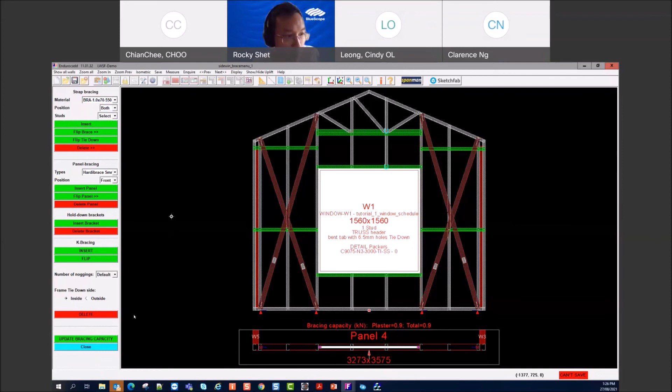Okay, so we put a bracing there, and then I put another one on this side, for instance. Okay, so that has been done, and we can quickly let the software do the calculation again.

To calculate the wind load again. Recalculate. Okay, it's putting the sheet down.

And very quickly, we can now relook into that wind sheet calculation. So we need to improve that 10.6 kilonewton to be better than that figure there. So you can see it has gone up, from 10.6 to 23. So we're still 10 kilonewton short.

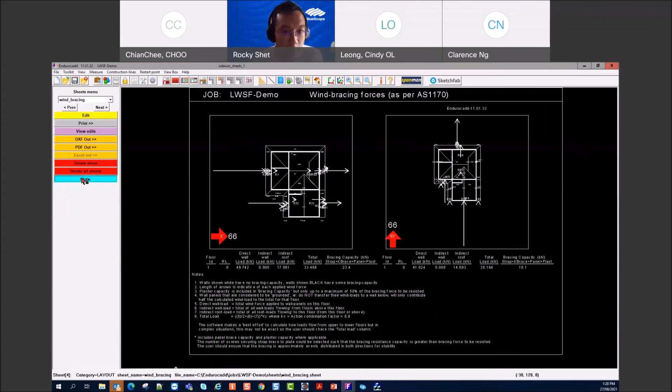So we again need to manually put in more bracing to make sure it is able to withstand that 33.49 kilonewton of wind force. So you don't have to calculate by hand.

Okay, sorry, I've overrun the time. It's fine. All right, so let's get to the Q&A.